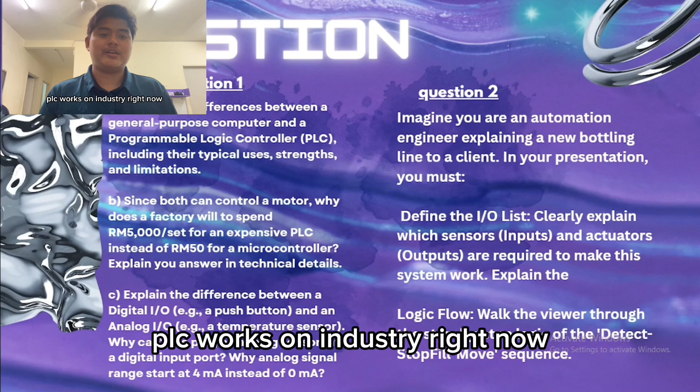Today I will present about the basics of industrial programming. My presentation is based on the two questions I got from my lecturer, question 1 and question 2, and I will explain how programmable logic controllers (PLC) work in industry right now. So without wasting our time, let's go to question 1.

So let's begin with question 1A. The difference between a general purpose computer and a programmable logic controller or PLC. As you can see in this table, a general purpose computer like your laptop or desktop at home runs operating systems such as Windows, Mac OS or Linux. It is designed for clean environments like an office or a home. You use it for browsing the internet, writing documents and programming or data entry.

Its strength is flexibility. You can do almost anything with it, but its limitation is reliability. It can crash, freeze or overheat, especially in dusty or hot conditions. A PLC, on the other hand, is built for the factory floor. It doesn't run Windows or any regular operating system. Instead, it uses real-time firmware that never crashes the way a PC does. It can handle dust, heat, vibration and electrical noise.

PLCs are used to control motors, conveyors, valves and sensors, real-world machines. Their strength is extreme reliability, 24 hours a day, 7 days a week. Their main limitation is cost. They are expensive and they are not good for complex computing tasks like heavy maths or graphics.

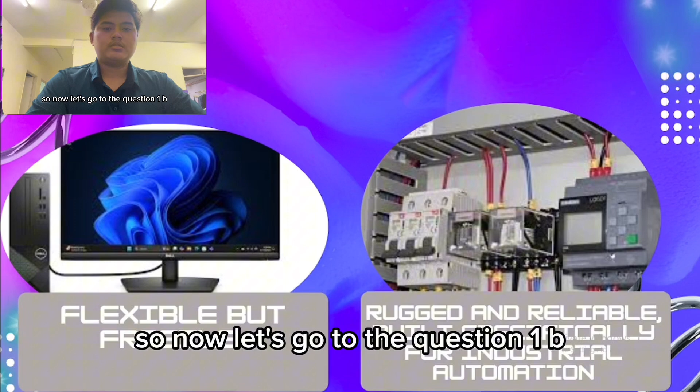So now let's go to question 1B. Why does a big company or factory spend 5,000 ringgit on a PLC instead of just 50 ringgit on a microcontroller? I have 3 main reasons. The first, the factory environment. A microcontroller is delicate and can fail in heat, dust or electrical noise. A PLC is built for these conditions. Second, reliability. A PLC runs for a year without crashing, but a microcontroller can freeze or reset. In a factory, even 1 minute of downtime can cost thousands of ringgit.

The third is safety and maintenance. PLCs meet international safety standards. They are modular and can be reprogrammed online. A microcontroller needs a full redesign and offline changes. So while a microcontroller seems cheaper, the true cost after adding protection, testing and downtime risk is often higher than the PLC. Factories pay for reliability because stopping production costs far more than 5,000 ringgit.

Next, we go to question 1C, digital I/O versus analog I/O. Digital I/O is simple, on or off. A push button gives either 0 volts or 24 volts, nothing in between. Analog I/O is a continuous range. A temperature sensor gives varying signals, 4 mA for cool, 12 mA for warm, and 20 mA for hot. Why can't we plug an analog sensor into a digital port? Because a digital port only understands on or off. It cannot read in-between values. You will get random or unreliable results.

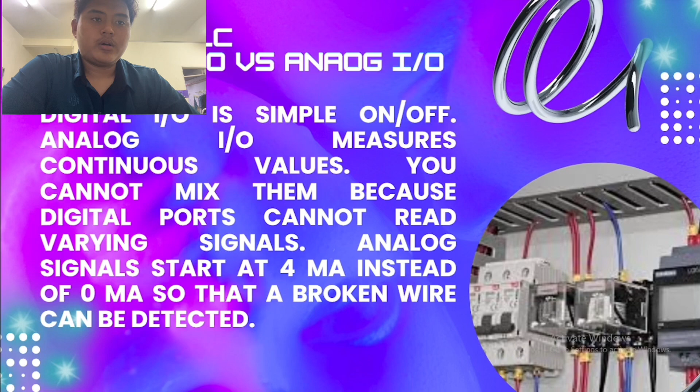Why does analog start at 4 mA instead of 0 mA? It's called a live zero. 4 mA means minimum reading and 0 mA means a broken wire. If it started at 0 mA, you couldn't tell the difference between a zero reading and a broken sensor. Starting at 4 mA makes troubleshooting safer and easier. So that's all for question 1.

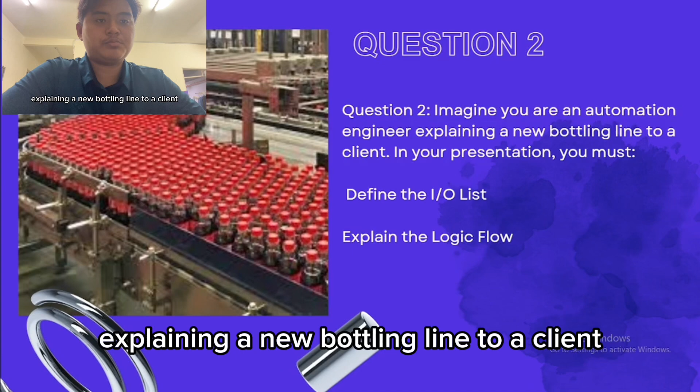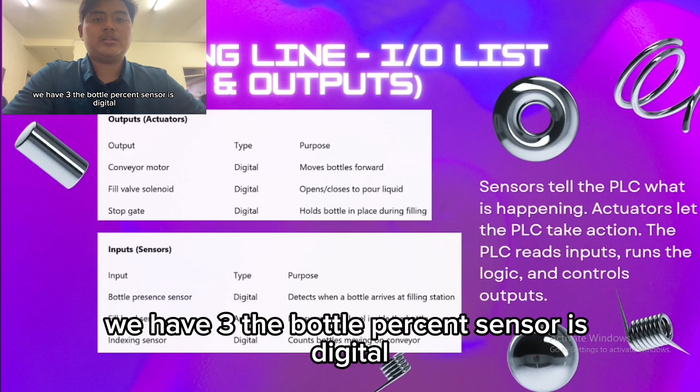So let's go to question 2. Imagine you are an automation engineer explaining a new bottling line to a client. In your presentation, you must define the I/O list and explain the logic flow. Now let me explain the I/O list for this bottling line. First, the inputs, the sensors; we have 3. The bottle presence sensor is digital. It tells the PLC when a bottle arrives at the filling station.

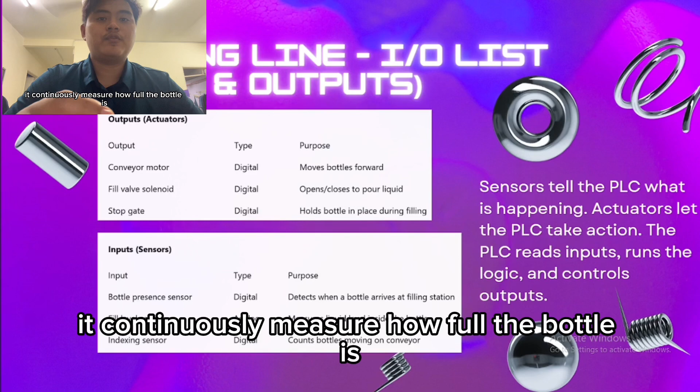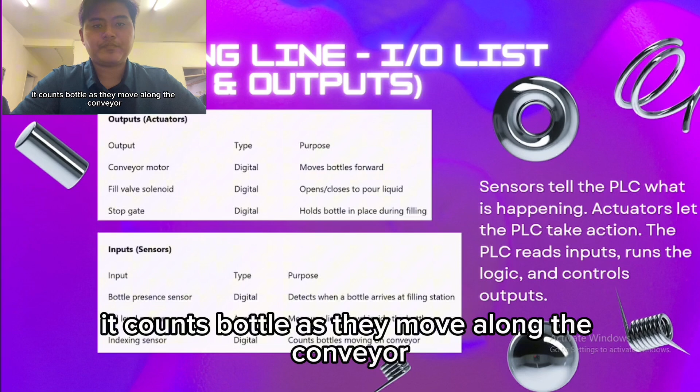Next, the fill level sensor. This one is analog. It continuously measures how full the bottle is using a 4 to 20 milliamp signal. Third is the indexing sensor, a digital sensor. It counts bottles as they move along the conveyor. So now let's talk about the outputs, the actuators. First, the conveyor motor. This is a digital output that moves bottles forward.

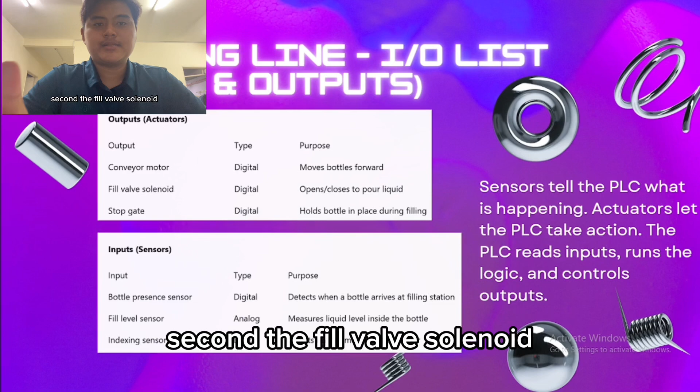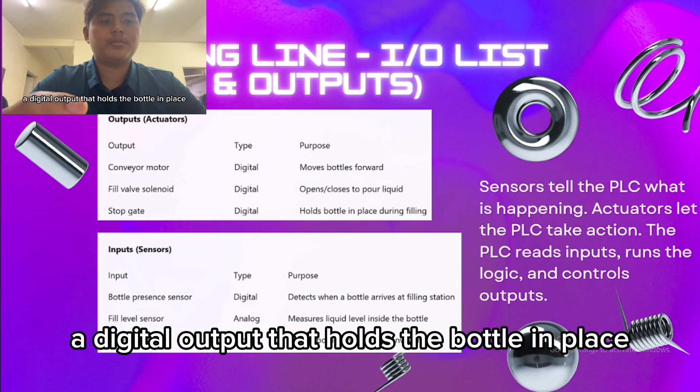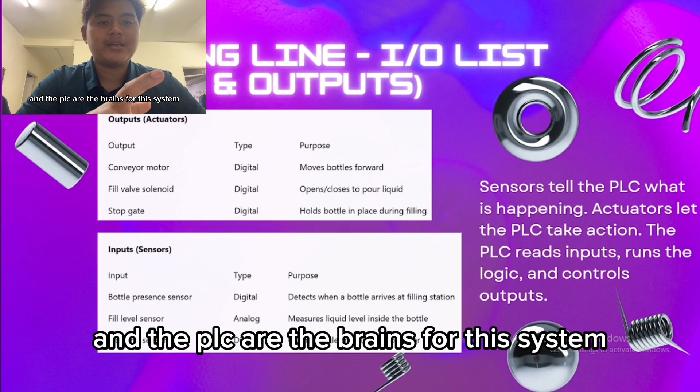Second, the fill valve solenoid, also digital. The PLC opens it to pour liquid and closes it when the bottle is full. Third, the stop gate, a digital output that holds the bottle in place during filling. In short, sensors are the eyes, actuators are the hands, and the PLC is the brain of this system. So now let me walk you through the step-by-step logic flow of the bottling line.

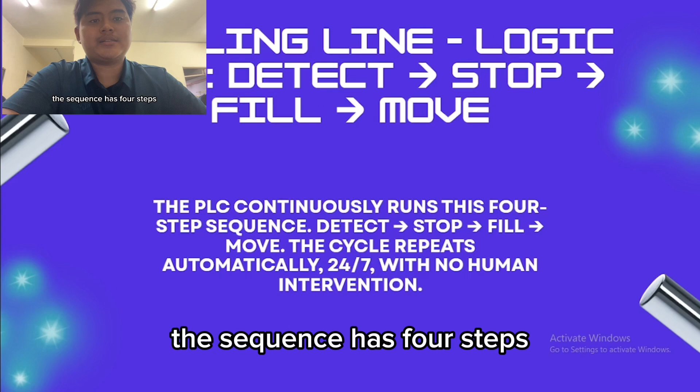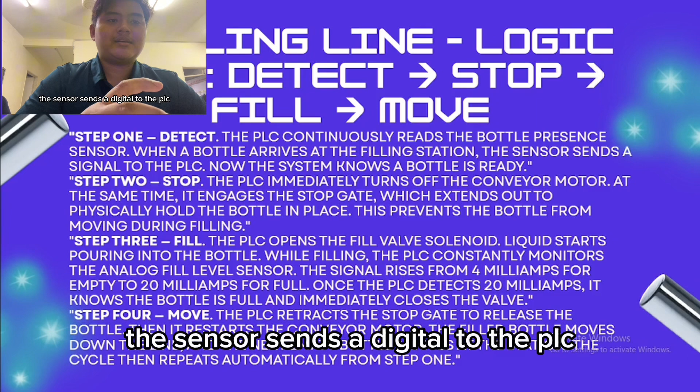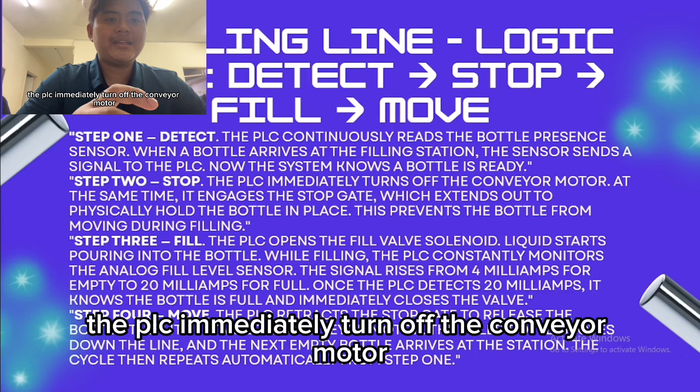The sequence has 4 steps: detect, stop, fill, and move. Step 1, detect. The PLC continuously reads the bottle presence sensor. When a bottle arrives at the filling station, the sensor sends a digital signal to the PLC, and now the system knows the bottle is ready. Step 2, stop. The PLC immediately turns off the conveyor motor. At the same time, it engages the stop gate, which extends out to physically hold the bottle in place. This prevents the bottle from moving during filling.

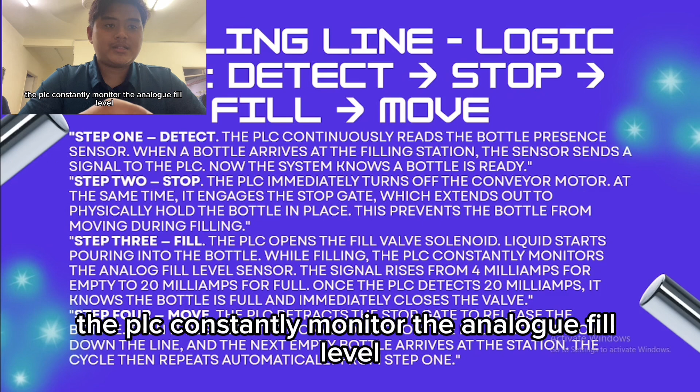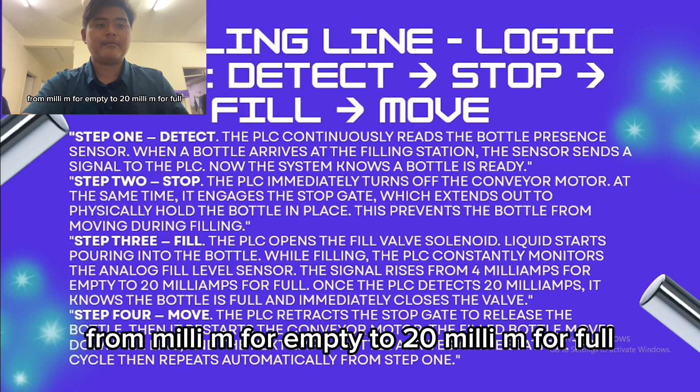Step 3, fill. The PLC opens the fill valve solenoid. Liquid starts pouring into the bottle. While filling, the PLC constantly monitors the analog fill level sensor. The signal rises from 4 milliamp for empty to 20 milliamp for full. Once the PLC detects 20 milliamp, it knows the bottle is full and immediately closes the valve.

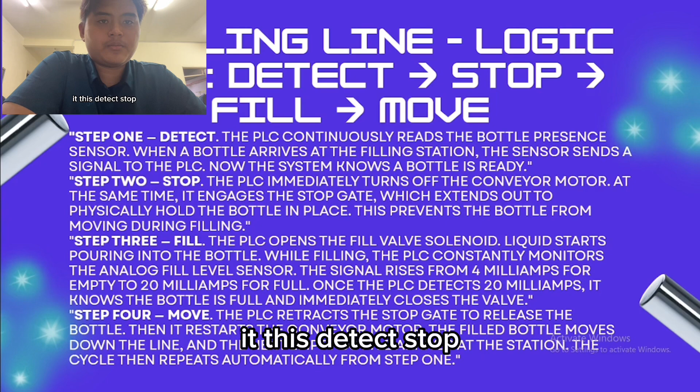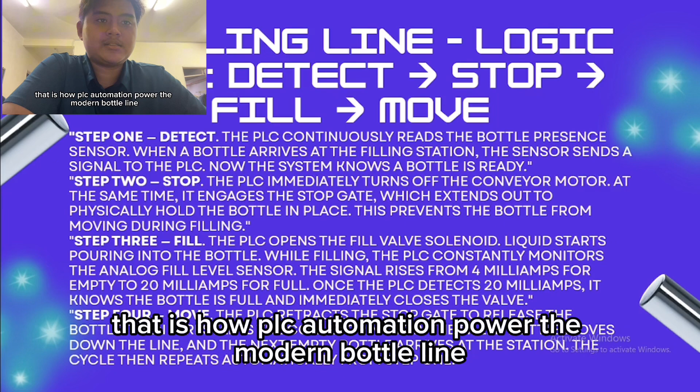Step 4, move. The PLC retracts the stop gate to release the bottle, then it starts the conveyor motor. The filled bottle moves down the line and the next empty bottle arrives at the station. The cycle then repeats automatically from step 1. This detect, stop, fill, move sequence runs continuously 24 hours a day, 7 days a week, with no human intervention. That is how PLC automation powers the modern bottling line.

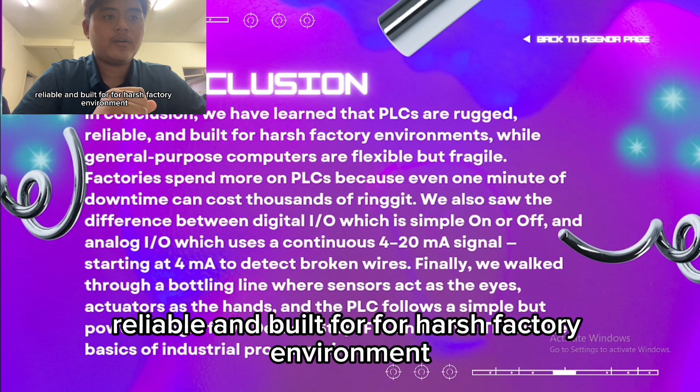So, for the conclusion, we have learned that PLCs are rugged, reliable, and built for harsh factory environments, while general purpose computers are flexible but fragile. Factories spend more on PLCs because even 1 minute of downtime can cost thousands of ringgit. We also saw the difference between digital I/O, which is simply on or off, and analog I/O, which uses a continuous 4 to 20 milliampere signal, starting at 4 milliampere to detect broken wires.

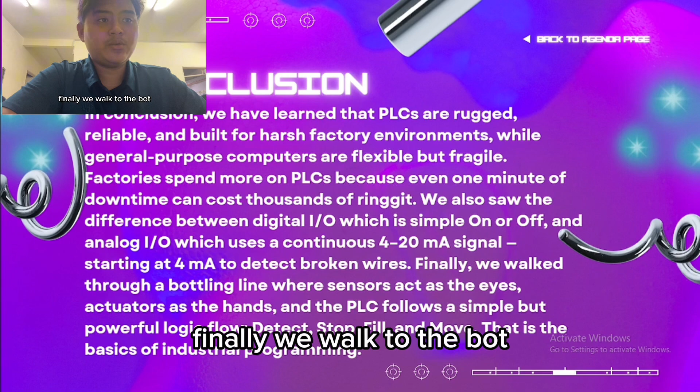Finally, we walked through a bottling line where sensors act as the eyes, actuators as the hands, and the PLC follows a simple but powerful logic flow: detect, stop, fill, and move. That is the basics of industrial programming.